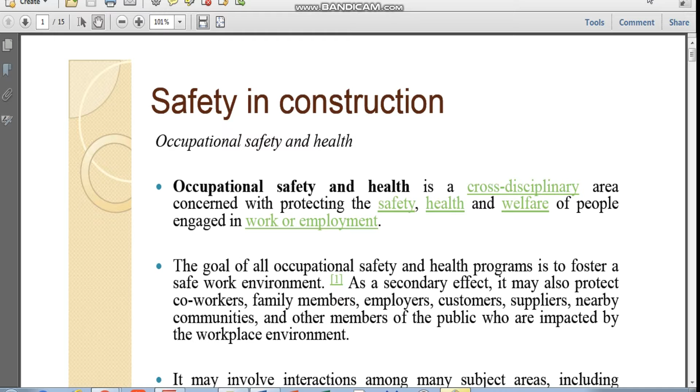So I have the other slides here also explaining these areas of safety in construction that you can actually read through as well.

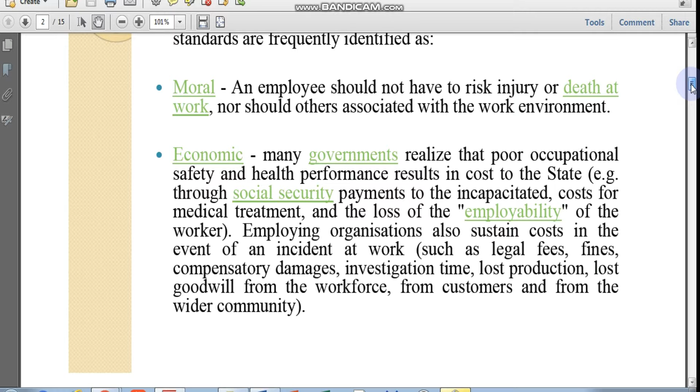These talk about what is occupational safety and health. It's about the welfare of the people in a work environment. What is it for? It's for moral, for economics, for social reasons, it's about legality, it's part of civil law.

So these are examples of the slides that I was talking about, of the slides I was talking about.

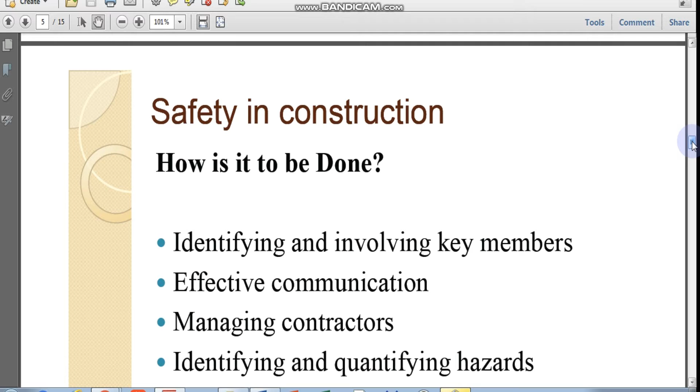So here, how can it be done? You must put it down. You must identify who are the people involved, and what are the communication modes.

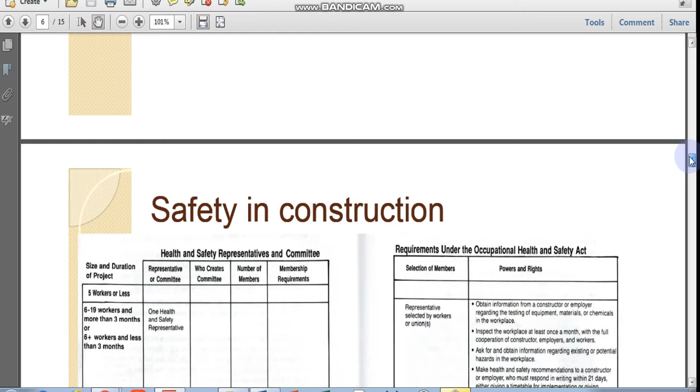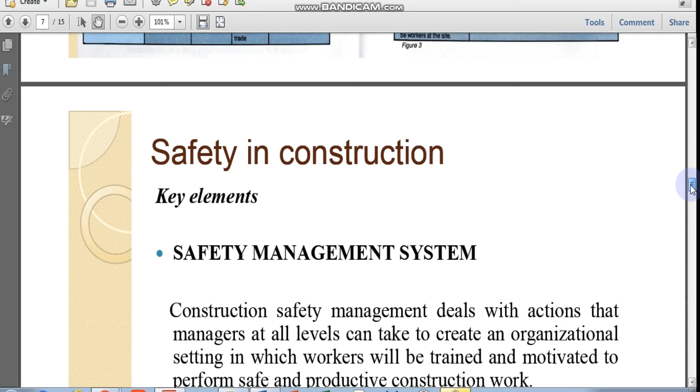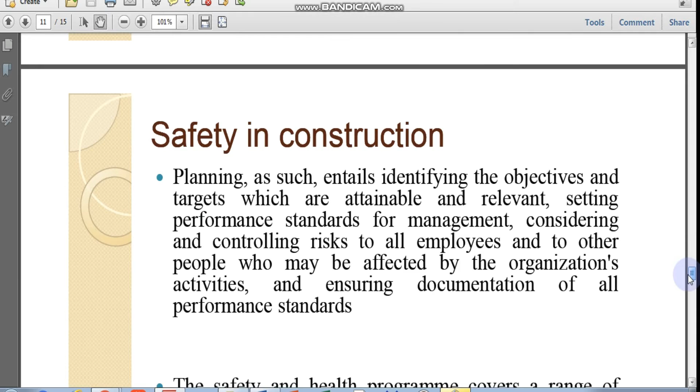How do you manage each day when the contractors and the workers come in, and all the paperwork involved, examples of what to do and what are their rights. These are part of your health and safety committee, and the safety management system: setting up safety policies, organizing, planning, and measuring safety performances. These are what we've been talking about.

Okay, and yes, the other aspect I want to talk about: this notes is actually supplementary to the construction safety I was talking about, so you can read this and the other one. They are complementary with one another.

The other thing I want to talk about is specific procedures, like for example scaffolding. A lot of places use bamboo scaffolding for high rises, and how they construct certain scaffolding.

These are very important, it must be in the safety plan. So scaffolding work, whether by bamboo or metal or steel, the work procedures for constructing that scaffolding must also be listed in your construction safety program, because that really deals with the safety of the workers.

Also, if the program involves road work on a public road, you must have very specific work safety procedures regarding digging of trenches, or putting up procedures to safeguard traffic, like flagmen, for instance when you construct a road or drain and close one side of the road, you need flagmen.

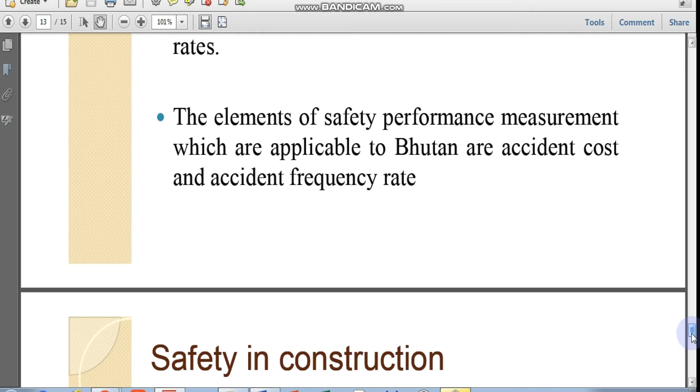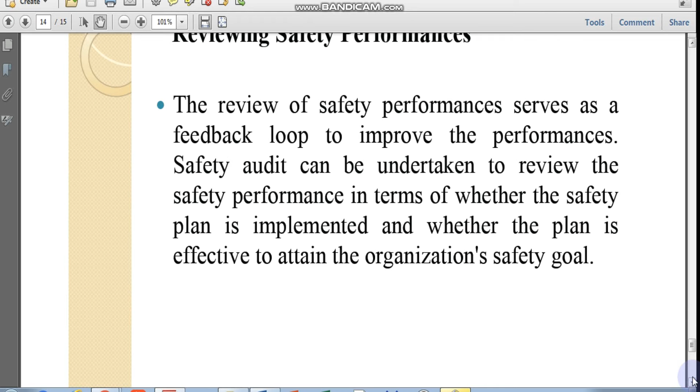When you write down what to do, you must also have a measurement, like quality control. There must be a certain number of checks, recordings, and measurements of performance, usually through checklists, checking whether specific procedures were followed and witnessed by certain people.

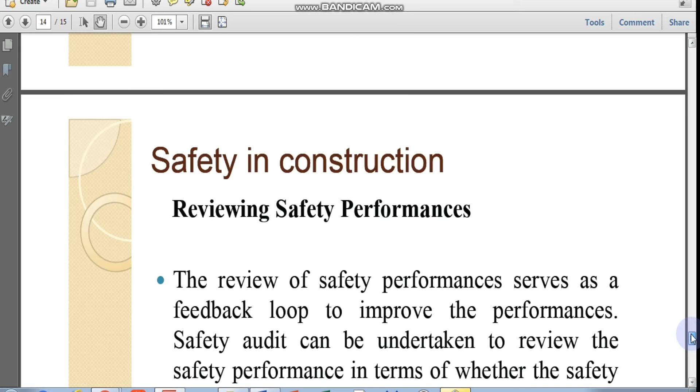So when we talk about performance, we talk about a specific measurement of the actual versus the plan. So we plan all your safety in the program.

What sort of checklist do you have? How many key members are actually checking every day, every week, and how many times they check, how many times they serve warnings, and how many times they record down incompetency or non-compliances. All this must be recorded and worked out into a statistic, and be reviewed week by week.

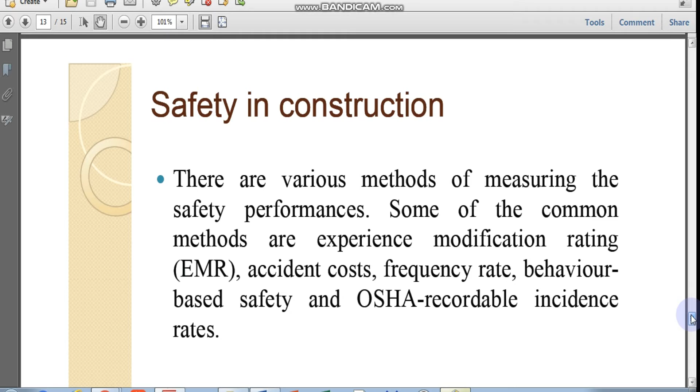So for a program of 5 million and above, they do expect you to have a proper safety officer on site, and it is a very big cost incurred. But this safety officer will do all this program - they will look after the performance, they will look after all this. These costs are there, but in case something does happen, you can be penalized with hundreds of thousands of ringgit. So you may as well keep a person there, and if they look into all these procedures and it is being carried out and not missed...

Then you're pretty much safe. You are being guarded as doing reasonably, the reasonable standard of the industry. So we must keep that reasonable standard.

So the main thing is you cannot over-expect, because it is after all a construction site, it is a dirty environment, it is unclean, and it is difficult to manage like 50, 60, 70, 80, 100 people on site. It is difficult, and you are managing people who have primary 6 education or form 3 education, who just don't understand safety. So it can be difficult.

So what is the reasonable standard? Like I say, a lot of these deaths and accidents are acts of God - you cannot really prevent it in certain circumstances. It's very freaky - people get run down by an excavator, or wheeled over by an excavator because the brake wasn't pulled. Things like that. It is horrendous.

The accidents that we had were actually really weird as well, really freaky. But having said that, it does not mean that you don't do it.